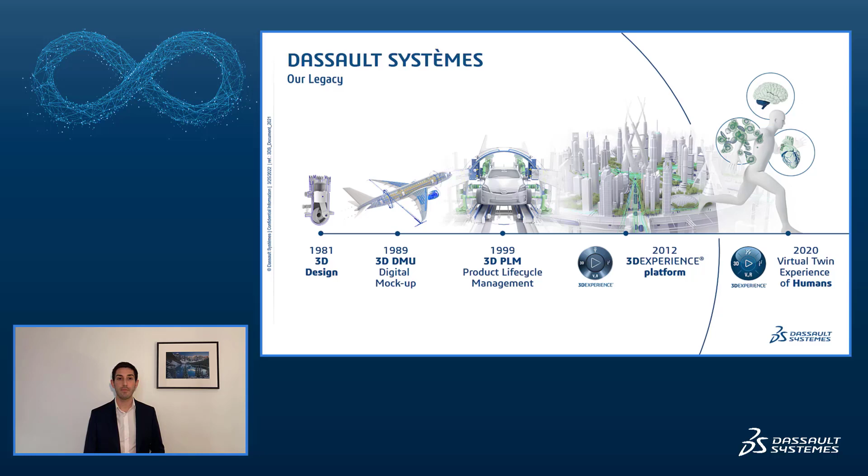So, what is the 3DEXPERIENCE? 3DEXPERIENCE is a platform that gathers brands applications for industries. We do not only focus on aerospace and defense, we are working with other industries, and we get knowledge from every industry to transfer and replicate it in other industries. In terms of brands and solutions, you probably know CATIA for the design. And if we talk about maintenance, repair, and overhaul, it is mostly used for retrofit, for instance.

So I was talking about Keep Them Operating. Keep Them Operating is a part of our global portfolio, and it focuses on the main domain of support and service aftermarket, starting from the OEM with the service item, the definition of the spare parts, the definition of the maintenance tasks. Then it goes to the maintenance planning and the maintenance execution with the airlines or with the armies, with MRO operators, to keep the aircraft and its systems operating.

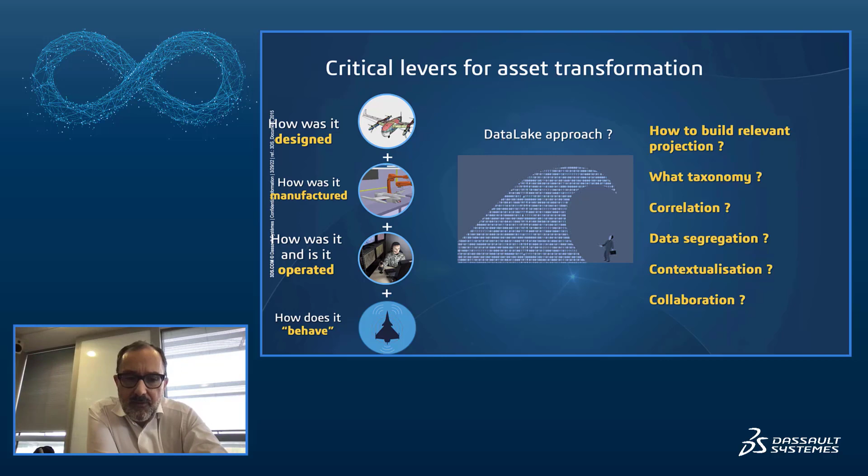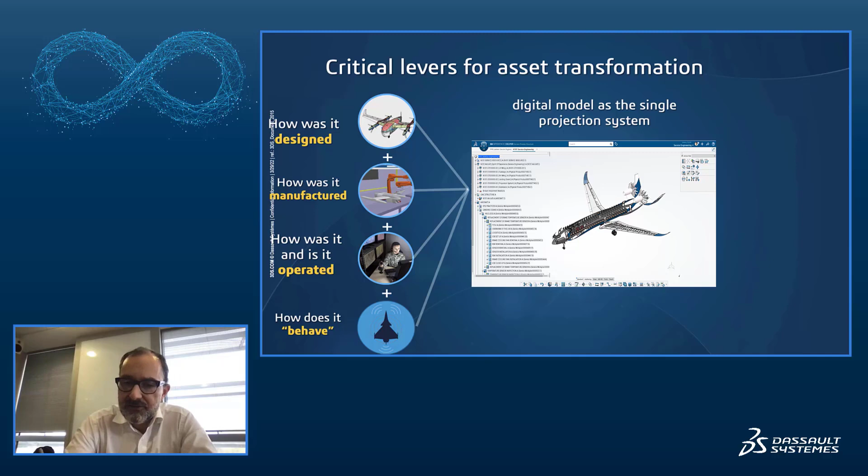In our belief, and this is what I said earlier with virtual twin experience, the digital model is by nature the most interesting representation to project and contextualize the data. So it's not about collecting the data and putting it into one single store. It's about projecting that data onto a referential. And the digital model of the aircraft is by far the most relevant referential that will allow contextualization, system-based segregation, security management, and so on.

But not only that, when you do that, you need to look at the data from different angles. You need to look at it from the angle of the fleet, because you want to optimize the availability of the fleet. You want to look at it from the availability of each individual aircraft, or from the availability of specific equipment. Not only that, but to solve challenges and issues, you need to empower, enable collaboration, trigger collaboration between the organizations that may be everywhere, that are doing the engines, or the systems or the missiles, and so on.

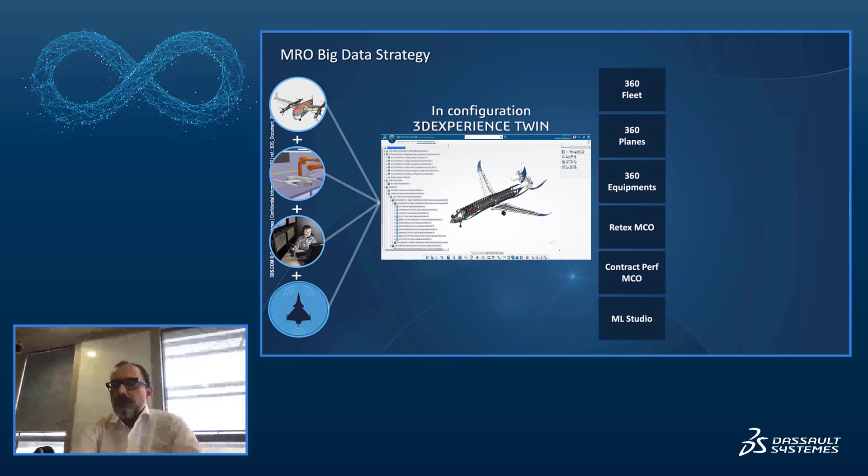So when I mentioned virtual twin experience is at the core of everything, that's a good potential illustration. Connect the whole of the data into the virtual model of the aircraft around specific data analytics and data investigation applications to manage fleets and performance, while triggering the relevant collaboration methods with all of the industrial players that may have a role in this play. I will let the rest of my team get you more details on how this actually works.

Thank you. Thanks, Morgan, for this introduction.

This product lifecycle management will help the teams to perform better during the maintenance activities. And this will be done thanks to the virtual twin by mapping real-life data on the asset definition of the systems. Now, to improve the overall availability of assets in operation, there are different parameters that have to be taken into consideration. The fleet availability can be seen as a breakdown between many parameters.

The first one, and an important one, is what we call the long feedback loop. This will consist in analyzing all the defects coming from the different systems and planes and see if we can find any commonalities that might help to say if this problem has been identified to be neutralized using the failure mode and effects analysis, or if it's a new problem that might need to be solved for the future generation of assets thanks to a design and engineering change. On the other hand, for the existing fleet of assets in operation, the major goal is to anticipate a future failure and globally the availability.

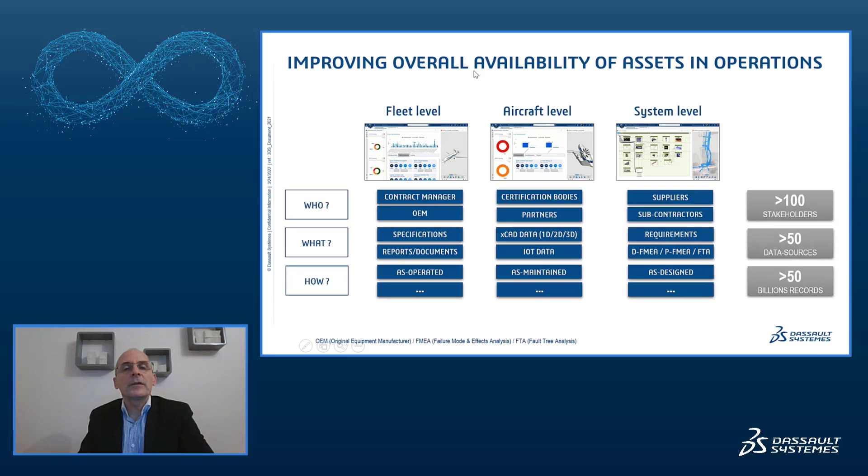And this, of course, when you look at the amount of data that it's representing, including the IoT, you have to crawl across more than 50 billion records. So that's really the challenge. So how are we doing that?

As I said, you will have multiple types of data sources, structured, unstructured, that you will have to connect together. And this will be done thanks to what we call a knowledge graph, in which you will have the ability to define links between the systems in which you will capture the event that is coming from the field, and then to build relationships that will help you to understand how to get to the root cause.

And this will be done because you will stepwise have to analyze different data in different systems, giving you information for different disciplines at different moments. And thanks to these different links that you can build and bridge together, it will help you to drive your investigation better and faster.

So this information, now that we have captured it and made it available in one, let's say, unified model, what we call the knowledge graph, which is abstracting the complexity of the different IT systems, we will build on top of that what we call an ontology layer. It means that at different moments, in different disciplines, different people might talk about the same thing but with different wording. And at the end, if you want to be able to apply rules and do investigation, it is important to have a common understanding of the different meanings that you have.

This ontology layer will help to build this foundation, on top of which you can implement what we call the data sciences, which are the models that are going to be performed to train and to detect weaknesses in the signals or find commonalities between problems.

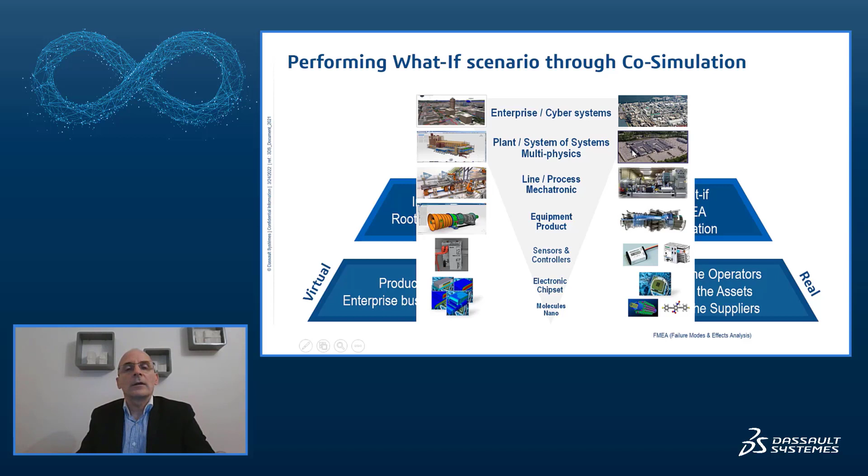And this capability will really help the team to represent on the virtual model complex things that you cannot understand if you don't see them, or you can also use the model to reproduce and make visible phenomena that are hidden just because of the structure of the plane or the system, or just because of the nature of the signals.

And having this ability to bring all this in the 3DEXPERIENCE, available in one single place, having the ability to collect the data, to reveal it, and then also to collaborate between the different stakeholders, which are all in different disciplines, gives you the ability to really improve the maintenance and to be better in the way that you repair and reshape, let's say, the activities.

Now, let's see in reality how this is happening and how it is implemented. And I turn now to Jeremy, who will give you the presentation of a real-life case. Thanks.

Thank you very much, Stefan.

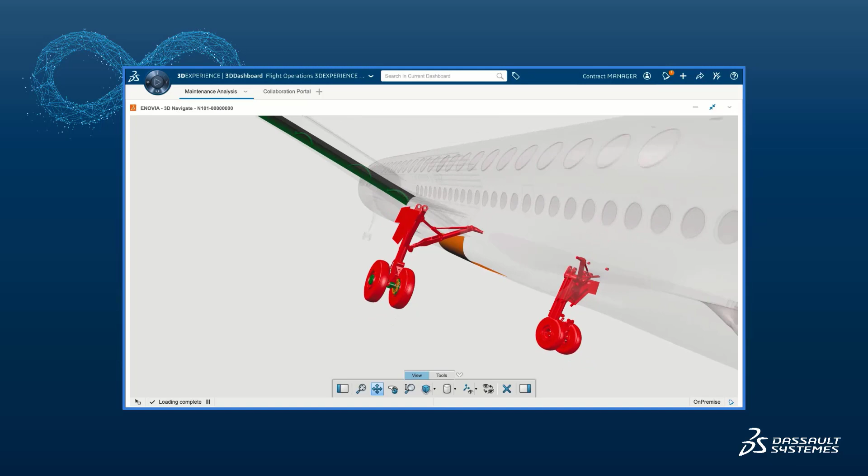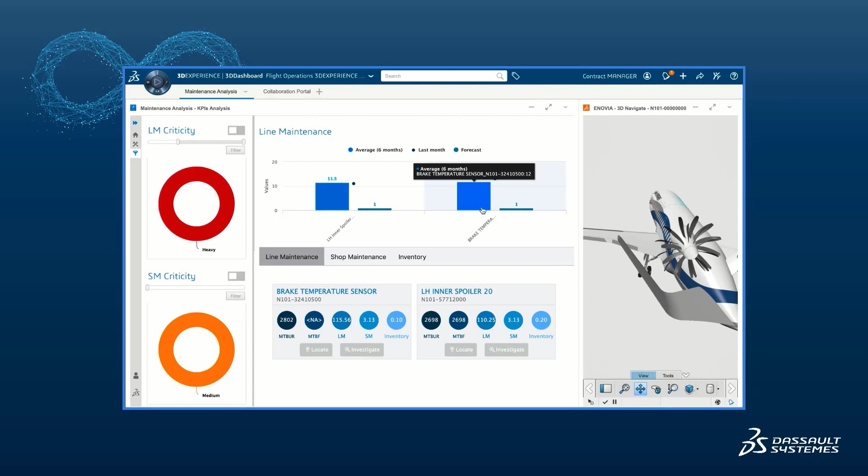As usual, we use the 3D to reveal the criticality of some issues or some defects that have been detected on the aircraft, and we can filter these issues by criticality to investigate through some specific issues.

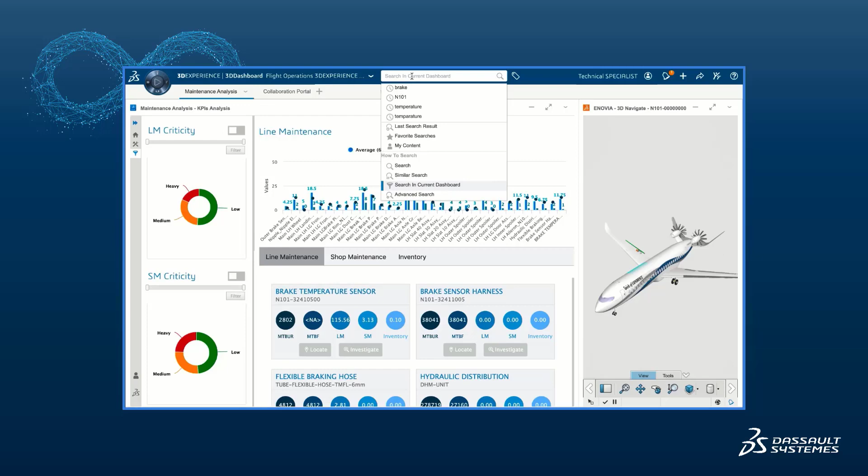As a collaborative platform, we really want to show you here how we manage the program management through project planning. So we will assign some tasks to investigate the issues that have been detected on a given aircraft. And to do that, we create some tasks that are now in progress. So this task has been taken over by the technical specialist, and he will now be able to run some investigation over the different issues that have been reported.

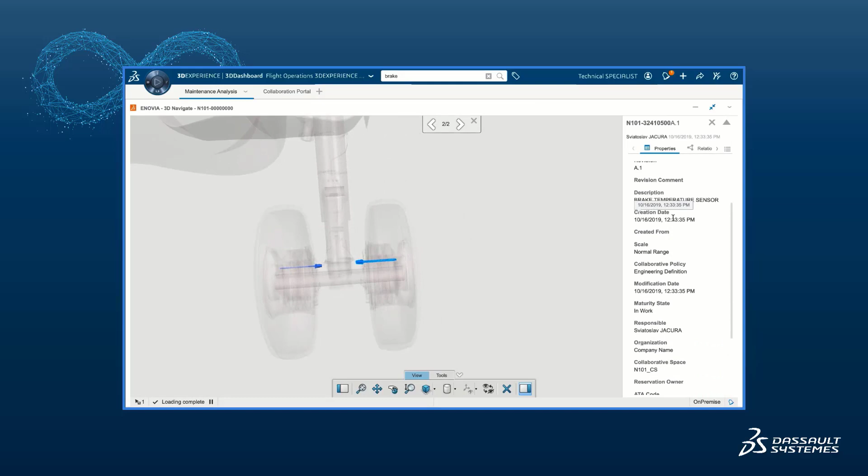Here you have an overview of data collected. You can locate through the 3D where the issues are detected. So in that specific case, we will focus on the brake temperature sensor, and we will run some investigation on the brake temperature sensor data. As we have all the data available in one database, we really get a 360 degree view of an aircraft and its flight in order to compare equipment problems between each other and get the root cause analysis.

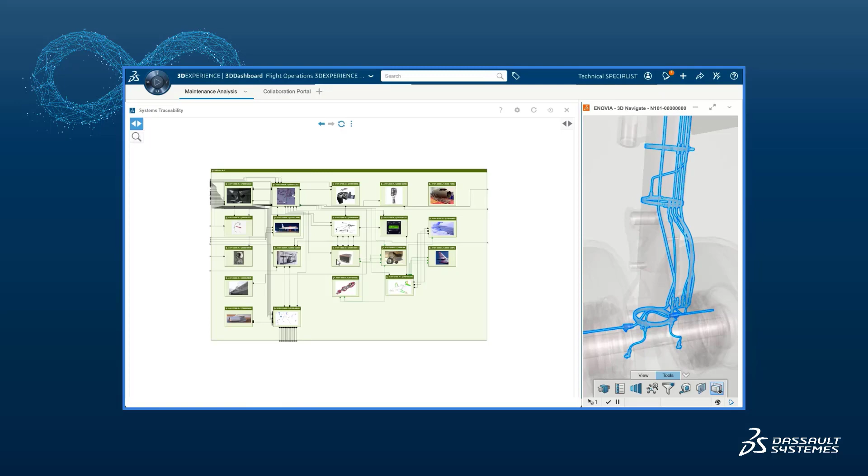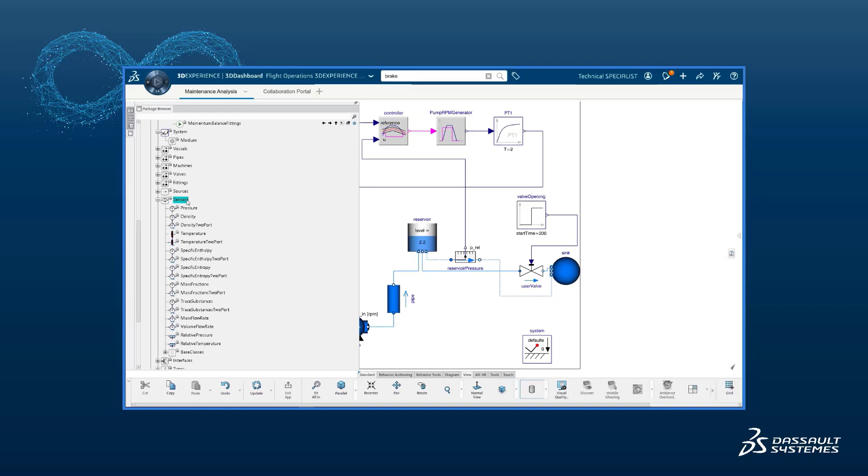We can always navigate and use that cross-domain platform to ensure that we have full visibility of the systems. For example, here we are navigating within the architecture systems of the landing gear and the aircraft. So we can use that to better understand what is the snowball effect, for example, of one specific issue, how it could impact, in our case, the temperature sensor, and that will help us to investigate through the different data that we have available here.

Keep in mind that all the data are either collected from the maintenance shop floor, or they are collected from the aircraft, and we have both collected and real-time data. So here we are creating an investigation, and we will run some semantic analysis to be able to understand what happened to the sensor, what was wrong with it. So we run through the analytics of the fleet. We have the different operations that have been performed on that aircraft, like installation or removal of the sensor during the last maintenance operations. We can integrate this information into our report.

And we can also have a look at a specific aircraft to better understand what happened, what was the in-flight data or the ground speed and altitude, what was the temperature of the brakes at a given moment, so we can understand what happened on the aircraft. All of this data can come from different systems, but they are all stored in the 3DEXPERIENCE platform, so you have all the data from all the systems available in one place. That's really a plus for the analysts to understand what happened on the issues that have been reported.